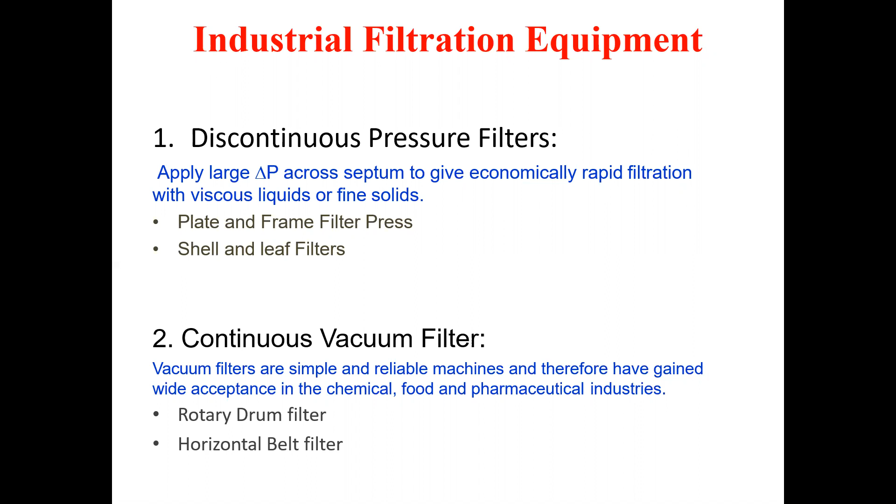Second one is continuous vacuum filter. Vacuum filters are simple and reliable machines and therefore have gained wide acceptance in the chemical, food and pharmaceutical industries, in which there are rotary drum filters and horizontal belt filters.

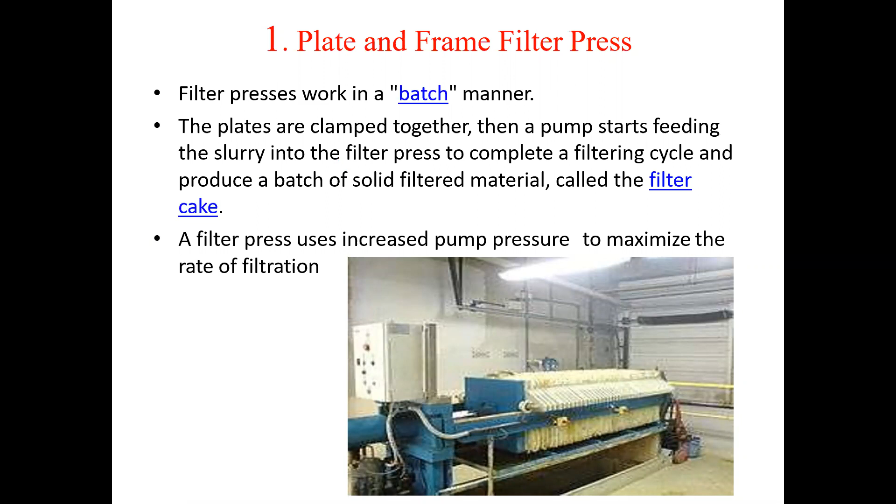Plate and frame filter press works in a batch manner. The plates are clamped together, then a pump starts feeding the slurry into the filter press to complete a filtering cycle and produce a batch of solid filtered material called the filter cake. A filter press uses increased pump pressure to maximize the rate of filtration.

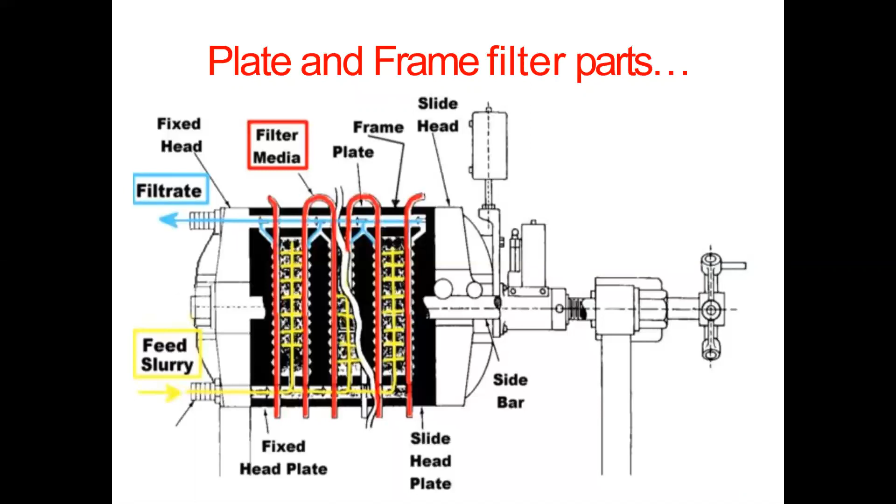This is the diagram of the plate and frame filter parts, in which the blue one is the passage for filtrate, the yellow one is the feed slurry passage, and the red one is the filter media. By black it is fixed head plate and slide head plate. Then there are side bars, and this is the medium scale frame and filter press.

Then shell and leaf filter - in these horizontal pressure leaf filters, jacketing and cloth enveloped filters are optional. There are two hydraulic cylinders to open and close the special bayonet wedge lock closure which is provided at the lid.

The retractable filtered shell is mounted on four external wheels, and all nozzle connections are mounted on the fixed head of the filter vessel. Appropriate interlocking, that is preventing opening under pressure, is also a key feature of this type of horizontal pressure leaf filter, and it ranges from 5 square meters to 250 square meters available.

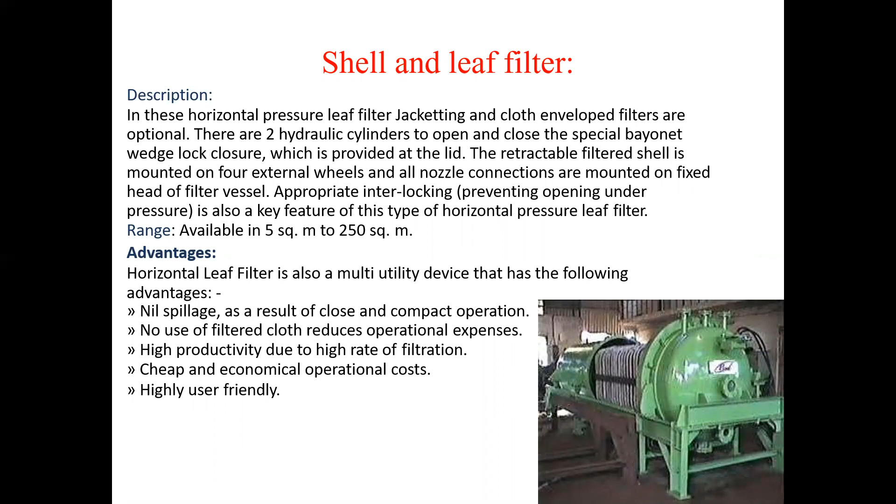Advantages of horizontal leaf filter, which is also a multi-utility device, include: nil spillage as a result of close and compact operation, no use of filtered cloth which reduces operational expenses, high productivity due to the high rate of filtration, cheap and economical operational costs, and it is highly user friendly.

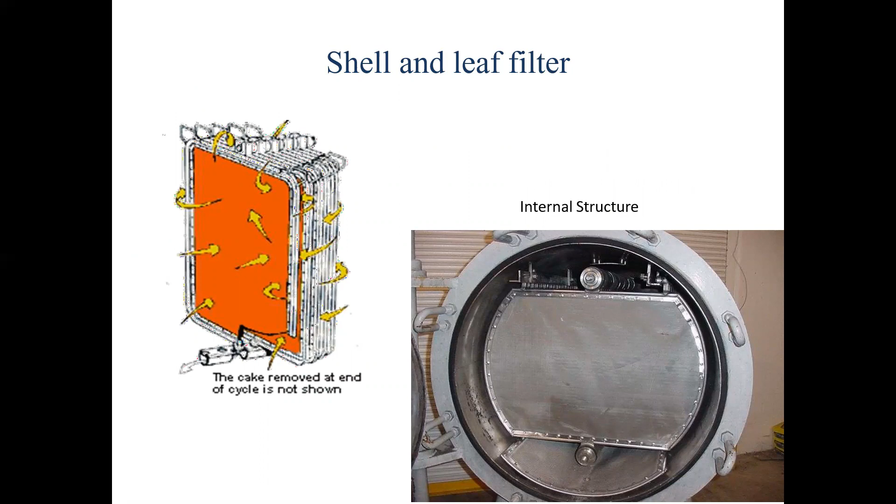This is the diagram or picture which is showing the shell and leaf filter. The cake is removed at the end of the cycle.

Then rotary drum filter. Rotary drum filter has a horizontal drum that turns at 0.1 to 2 RPM in an agitated slurry trough, and filter medium covers the face of the drum, which is partially submerged. Vacuum and air are alternately applied as the drum rotates.

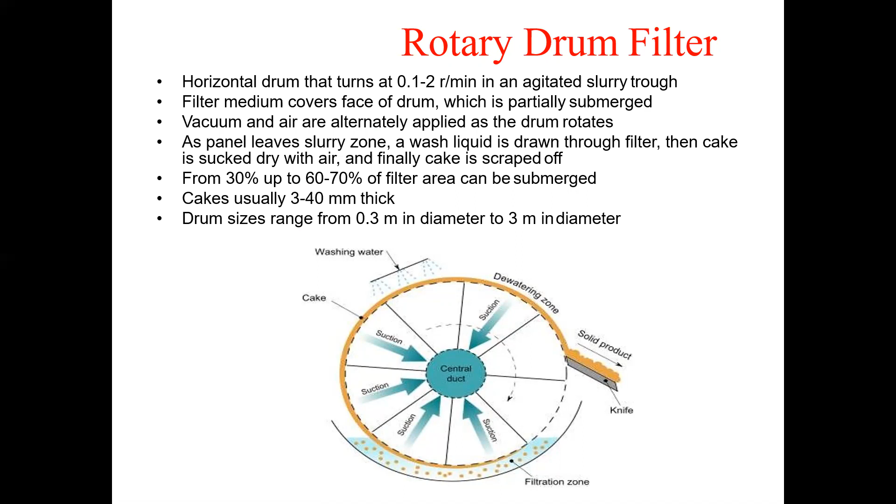As the panel leaves the slurry zone, a wash liquid is drawn through the filter, then the cake is sucked dry with air, and finally the cake is scraped off. From 30% up to 60 to 70% of filter area can be submerged. Cakes are usually 3 to 40 mm thick. Drum sizes range from 0.3 meter to 3 meter in diameter.

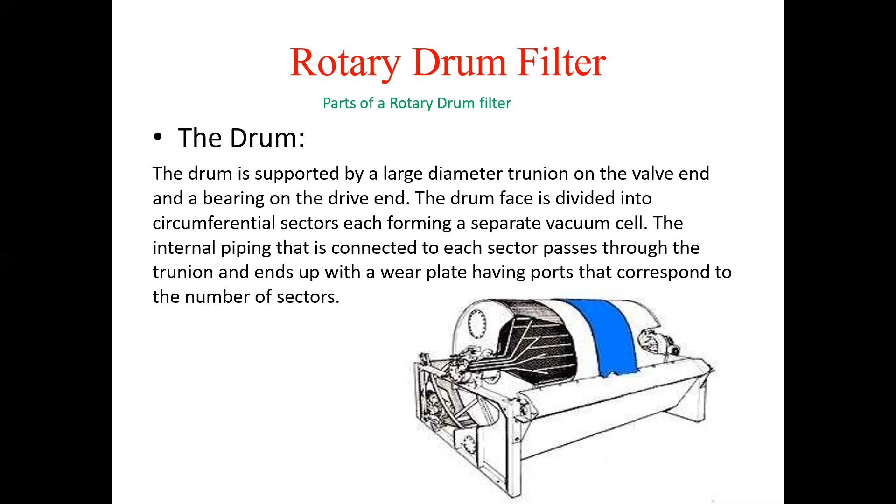The drum is supported by a large diameter trunnion on the valve end and a bearing on the drive end. The drum face is divided into circumferential sectors, each forming a separate vacuum cell. The internal piping connected to each sector passes through the trunnion and ends up with a wear plate having ports that correspond to the number of sectors.

When a sector enters submergence, vacuum commences and continues through washing, if required, to a point where it is cut off and blow takes place to assist in discharging the cake. The valve has, on certain filters, adjustable blocks, and on others a fixed bridge ring.

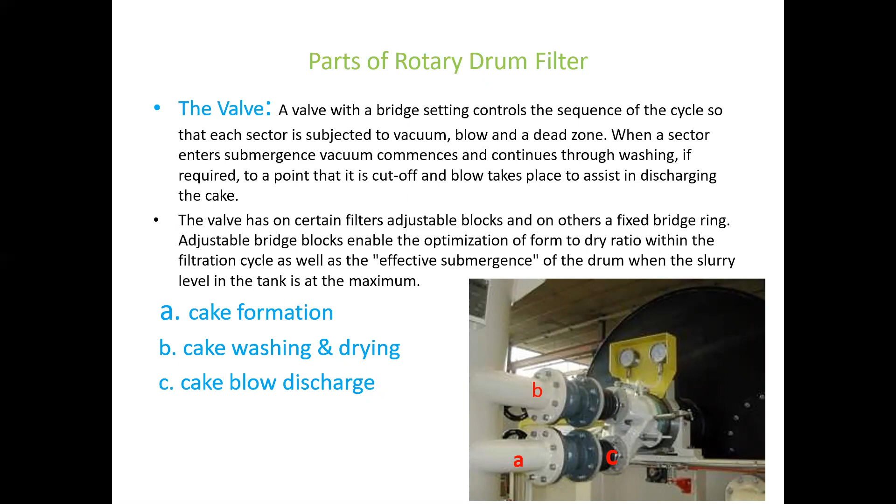The parts of the rotary drum filter are the internal piping and the filter cloth. The filter cloth retains the cake and is fastened to the drum face by inserting special caulking ropes into grooved division strips.

Nowadays, with some exceptions, filter cloths are made from synthetic materials such as polypropylene or polyester with monofilament or multifilament yarns, and with sophisticated weaves and layers.

Another option, quite often used on belt discharge filters, is to join the ends with a special sewing machine.

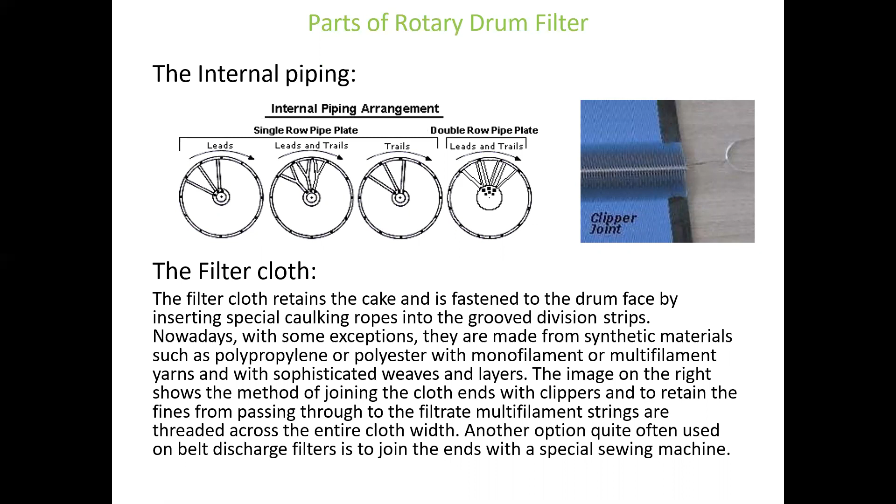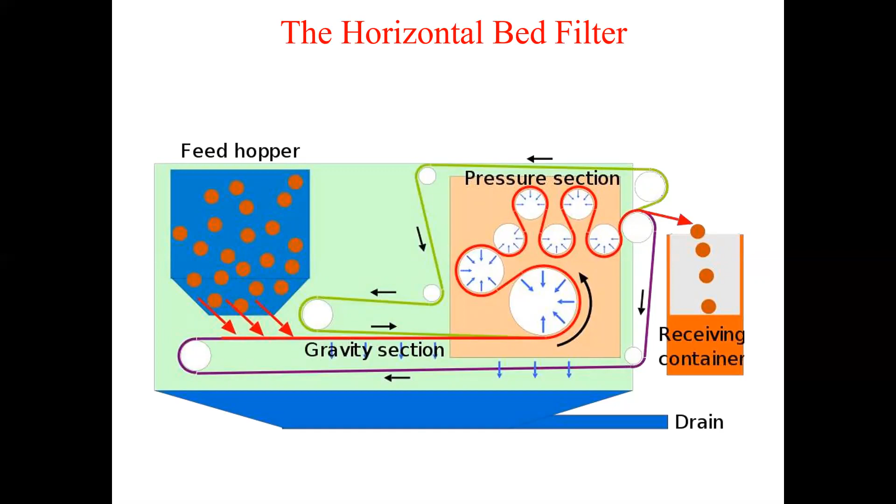This is the horizontal bed filter, in which the feed is passed by the hopper, then by the gravity section, then the pressure section, then the receiving container, by which it is drained.

Operation: the feed sludge to be dewatered is introduced from a hopper between two filter cloths, which pass through a convoluted arrangement of rollers.

As the belts are fed through the rollers, water is squeezed out of the sludge. When the belts pass through the final pairs of rollers in the process, the filter cloths are separated and the filter cake is scraped off into a suitable container.

A belt filter is generally used in phosphate fertilizer plants to separate the solid from slurry.

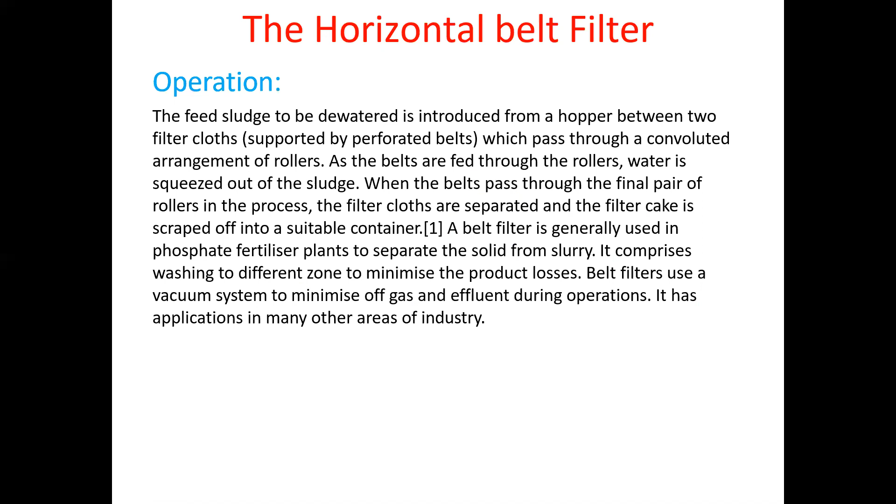It comprises washing in different zones to minimize product losses. Belt filters use a vacuum system to minimize off-gas and effluent during operations. It has applications in many other areas of industry.

Horizontal belt filter advantages are: continuous operation; intensive soluble recovery or removal of contaminants from the cake by counter-current washing; producing relatively clean filtrate by using a cloudy port or a sedimentation basin; polishing of solutions; convenient access to the cake for sampling or operator activities; easy control of operating parameters such as cake thickness or wash ratios; and a wide variety of materials of construction.

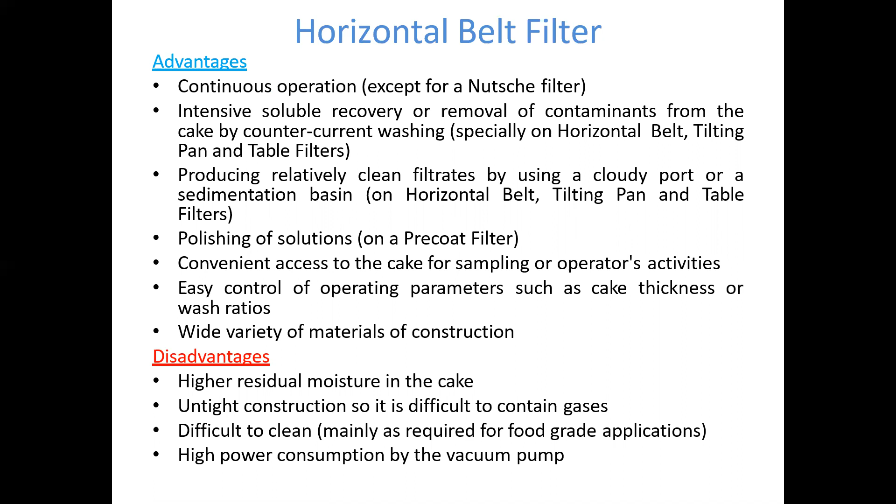Disadvantages are: higher residual moisture in the cake; untight construction, so it is difficult to contain gases; difficult to clean, mainly as required for food grade applications; and high power consumption by the vacuum pump.

Next filter is the tray filter. The tray filter, as opposed to the horizontal belt filter, belongs to the group of top feed filters and is primarily applied to finer chemical compounds handling thin cakes, although in recent years, large machines suitable for thick cakes may be seen on bulkier processes.

Sizes may vary from 0.25 to 3 meter wide units, and lengths of 2 meters for pilot units and up to 25 meters for industrial machines.

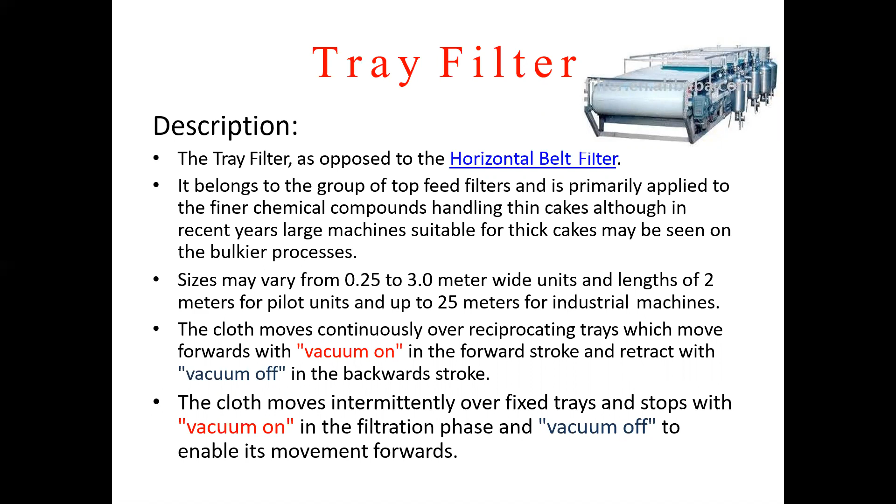The cloth moves continuously over reciprocating trays, which move forward with vacuum on in the forward stroke and retract with vacuum off in the backward stroke. The cloth moves intermittently over fixed trays and stops with vacuum on in the filtration phase, and vacuum off to enable its movement forward. Tray filter: the reciprocating trays type.

This filter consists of a series of trays which are allocated for cake formation, washing and drying. The trays are each connected through a flexible hose to a manifold that runs along the filter and collects the filtrate to the vacuum receivers.

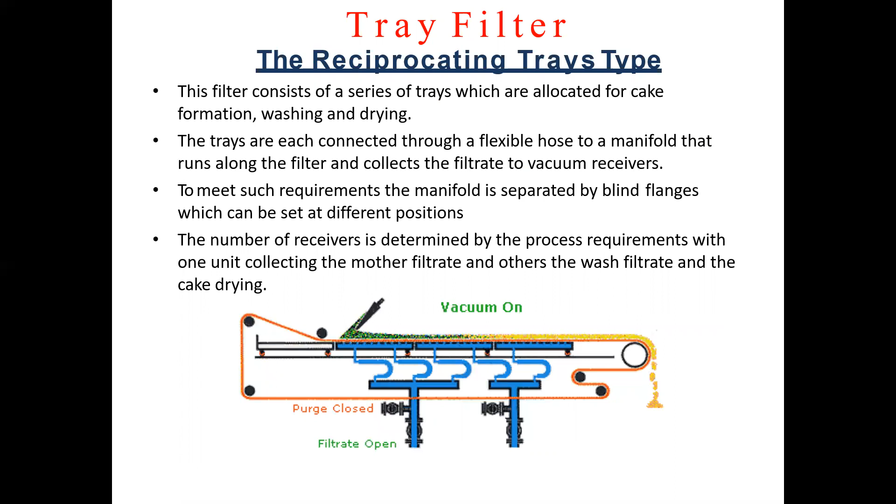To meet such requirements, the manifold is separated by blind flanges, which can be set at different positions. The number of receivers is determined by the process requirements, with one unit collecting the mother filtrate and others the wash filtrate and the cake drying.

The reciprocating trays are designed so that while under vacuum, they can move freely in the forward direction together with the cloth and at the same velocity. When they reach the end of the stroke point, the vacuum is cut off.

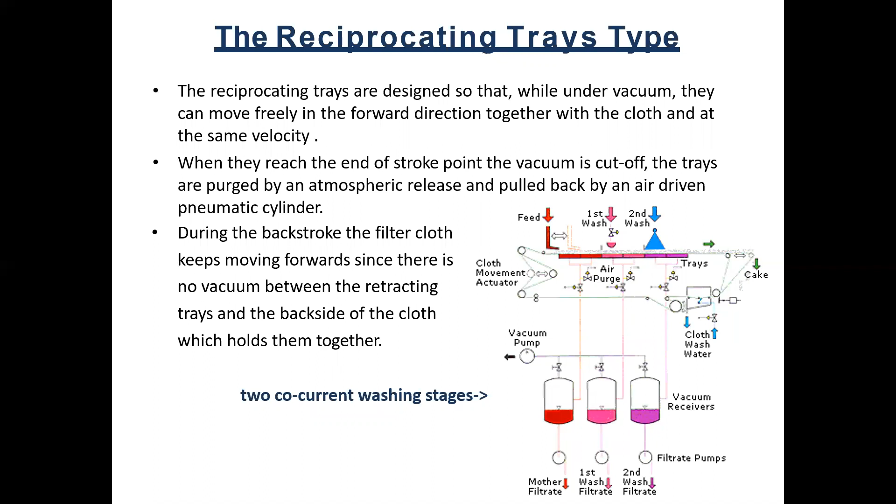The trays are purged by an atmospheric release and pulled back by an air-driven pneumatic cylinder. During the backstroke, the filter cloth keeps moving forward since there is no vacuum between the retracting trays and the backside of the cloth which holds them together.

Then the fixed tray type: the trays of the filter are fixed to the frame and the cloth moves forward in short increments during vacuum off, and remains stationary at vacuum on mode. The vacuum modes are controlled by solenoid actuated valves arranged in a similar method described in this section on the reciprocating type.

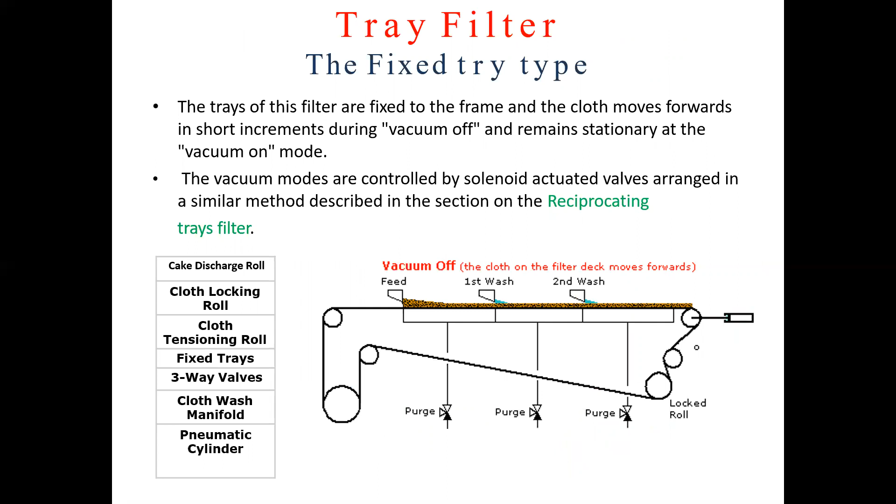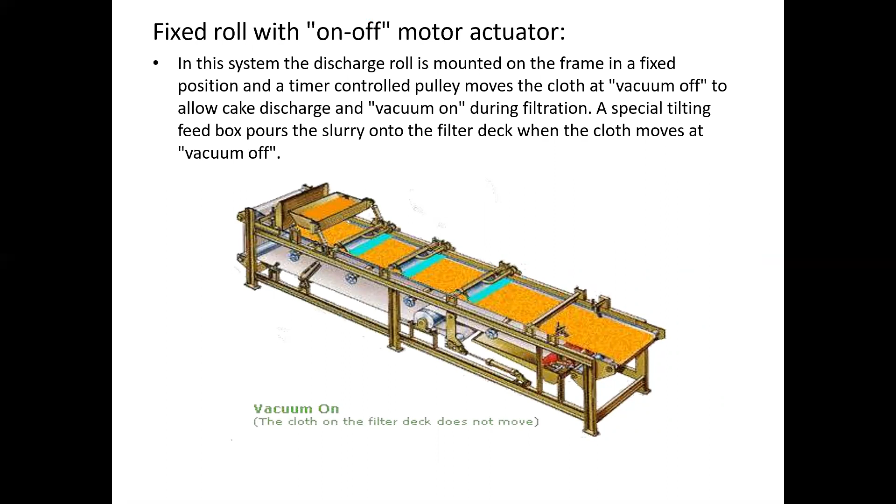Fixed roll with on-off motor actuator. In this system, the discharge roll is mounted on the frame in a fixed position, and a timer-controlled pulley moves the cloth at vacuum off to allow cake discharge, and vacuum on during filtration. A special tilting feed box pours the slurry onto the filter deck when the cloth moves at vacuum off.

Selection criteria for tray filter: they may be built for synthetic materials for construction, which makes them suitable to withstand highly corrosive applications without the use of exotic and expensive alloys. The sealing against loss of vacuum is simple, as opposed to rubber belt filters, which use sacrificial moving belts to seal between the underside of the main belt and the top flanges that run along the vacuum box.

They are built in a modular construction which enables expansion when circumstances so require. The separation of mother and wash filtrates is sharp and accurate, since as opposed to partitions in a vacuum box of rubber belt filter, the filtrate is contained in a tray. They lend themselves better than rubber belt filters when two vacuum zones are required, such as high vacuum for the feed and wash zones, and low vacuum with high air rates for the drying zones.

The power consumption is lower, since rubber belt filters require special arrangements to support the heavy belt and reduce friction. Features found more often on tray filters include gas tight enclosures, compression rolls and blankets, thermal drying, vibrating trays to seal cracks in the cake, and ultrasonic or chemical cloth cleaning.

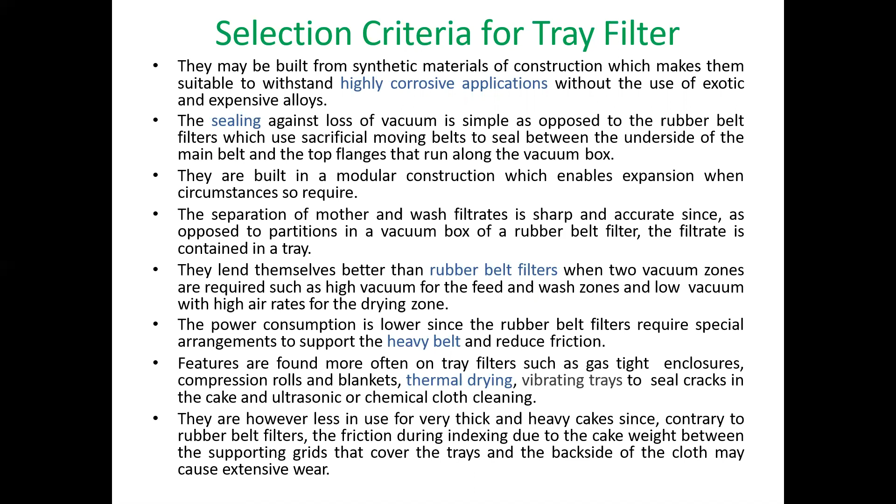They are, however, less in use for very thick and heavy cakes, since, contrary to rubber belt filters, the friction during indexing due to the cake weight between the supporting grids that cover the trays and the backside of the cloth may cause extensive wear. The disc filter is a type of water filter used primarily in irrigation, similar to a screen filter, except that the filter cartridge is made up of a number of discs stacked on top of each other like a pile of poker chips.

The water passes through small grooves, and impurities are trapped behind. Some types of disc filters can be backflushed in such a way that the discs are able to separate and spin during the cleaning cycle.

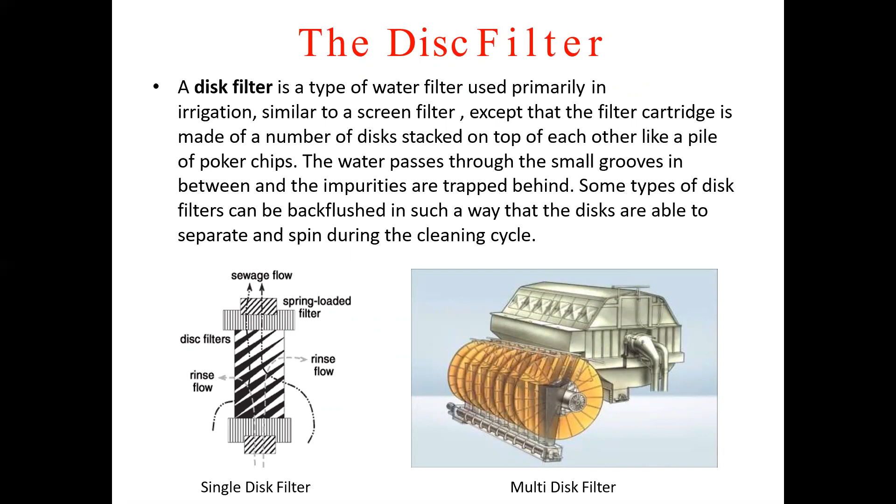The main elements of the disc filter are filtering cylinders made totally out of stainless steel quality. This cylinder is built in a specially designed machine, and this element has two side lids which support the filtering material together with a metallic framework which is easy to dismount or adjust.

Filtering mesh of 10 to 1,000 microns made in polyester, also available in stainless steel AISI 316L. Modular design allows easy access to the filtering cylinder from the exterior of the filter, quickly and easily. The shell or frame is a strong meccano construction welded in stainless steel quality, supplied with entrance and exit connections, anchoring legs, water tightness elements, etc.

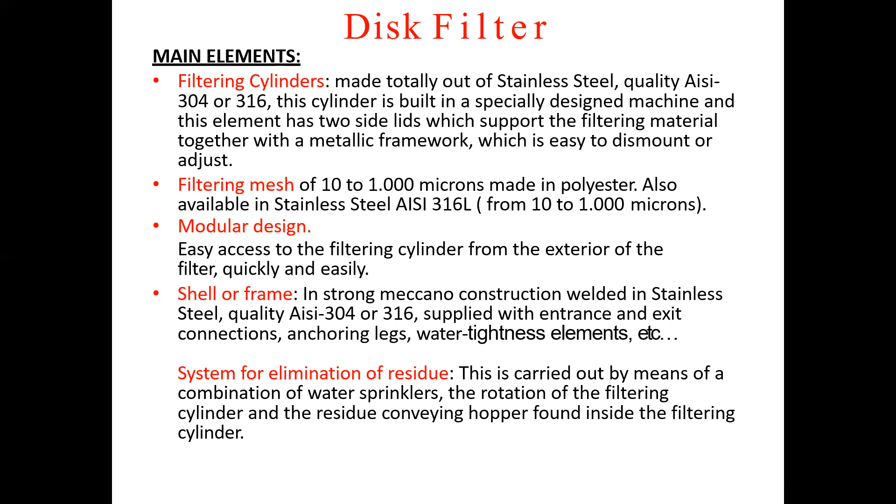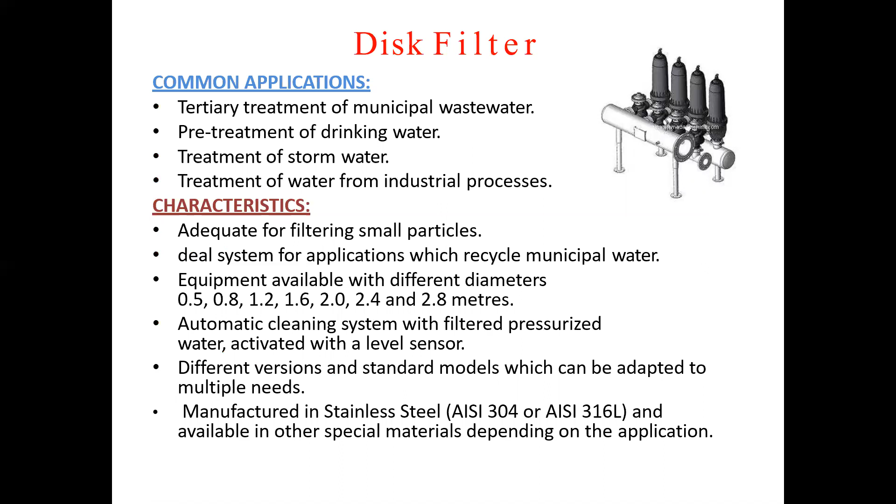System for elimination of residue: this is carried out by means of a combination of water sprinkler, the rotation of the filtering cylinder, and the residue conveying hopper found inside the filtering cylinder. The applications are the tertiary treatment of municipal wastewater, pre-treatment of drinking water, treatment of storm water, and treatment of water from industrial processes.

Hope you all are satisfied with this session.